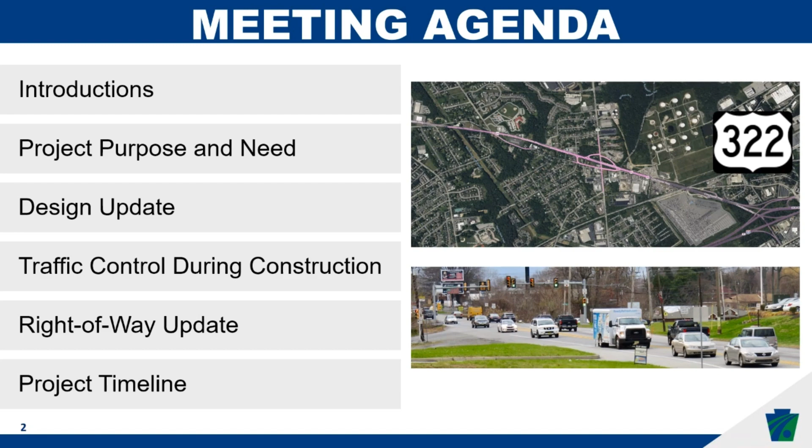Tonight's agenda will cover the project location, the project purpose, design updates, traffic impacts, right-of-way updates, and finally, project timeline. Now, I would like to turn the presentation over to the Design Project Manager, Al Tomaselli, to run through the project details.

Thank you, Merlene. Good evening, everyone. Al Tomaselli with Benesch. First, I want to provide you a general overview of the project. As you can see on the screen, this is a photo of US 322 in southern Delaware County.

We start our project at Route 1, all the way on the left side of your screen. That is Section 101 in green. It is primarily in Concord Township. That project was constructed between 2016 and 2020 and was finalized and is open as a 4-lane primary arterial right now. Section 102, currently under design, covers mostly Bethel Township, but also touches into Concord Township and Upper Chichester.

And the focus of tonight's presentation is Section 103 on the right side of your screen, which extends from approximately Chelsea Parkway through the 452 or Market Street interchange. There is also a section called MIT that you see in blue on the left, which was a mitigation section, where we included an operation staging area to replace the salt shed facility at the Foulk Road interchange that currently exists.

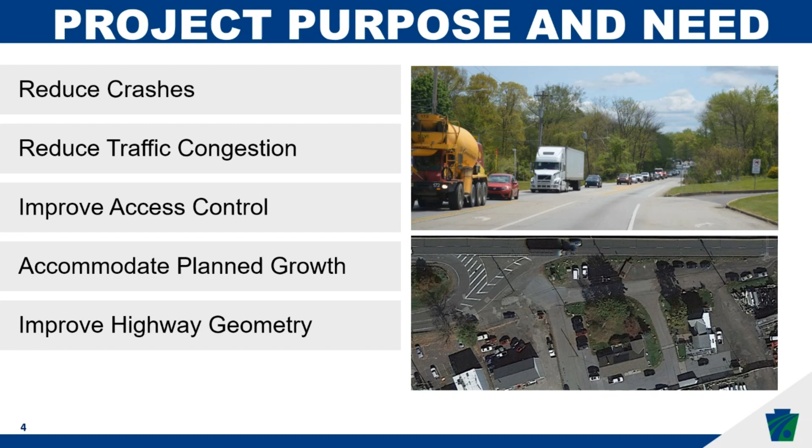Improve access control. What we mean there is there's a lot of uncontrolled access, so wide sections of pavement along the corridor where vehicles can enter or exit just about anywhere. Fourth, accommodate planned growth. If you've driven the corridor, you see a lot of growth out there, and there is still more to come. There are areas to work with, and we wanted to make sure that whatever we did was sustainable for the future. And finally, improve highway geometrics, primarily around the interchanges where acceleration and deceleration lanes are minimal, if existent at all.

Next slide, please. So as part of this project, we basically were going to widen the roadway to 4 lanes. The image on the right that you see is the first day that Section 101 was open in the area of Station Road. You see 4 lanes, left turn lanes, right turn lanes. You can see a little bit of a median in there in the middle of the picture.

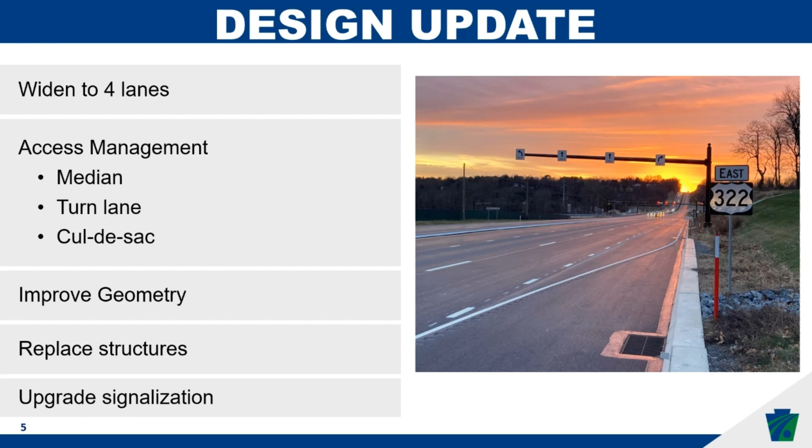That's pretty much the design that's going to go for the entire corridor. There will be a grass strip median with mountable curb on either side. There will be turn lanes for left turns and right turns at intersections, and cul-de-sacs, again, for access management. We're going to improve the geometry at the interchanges, replace all the structures along the corridor, and upgrade the signalization to increase throughput. Next slide, please.

Specifically to Section 103, the US 322 corridor will include 1.4 miles of pavement reconstruction. Some of this is reconstructing the existing 4-lane section, while other sections will be widened from 2 lanes to 4 lanes.

There are going to be 8 intersections reconstructed as part of the Section 103 project, including 4 signalized locations, 1 on 322 and 3 on Market Street.

We are going to be reconstructing 22 structures, including bridges, culverts, retaining walls, sound barriers, sign structures, and ADMS sign structures, which is what you see in the image on the right, and then 10 stormwater management facilities. Since we are widening the road, which increases the impervious pavement, we have to collect that water and control it and safely release it.

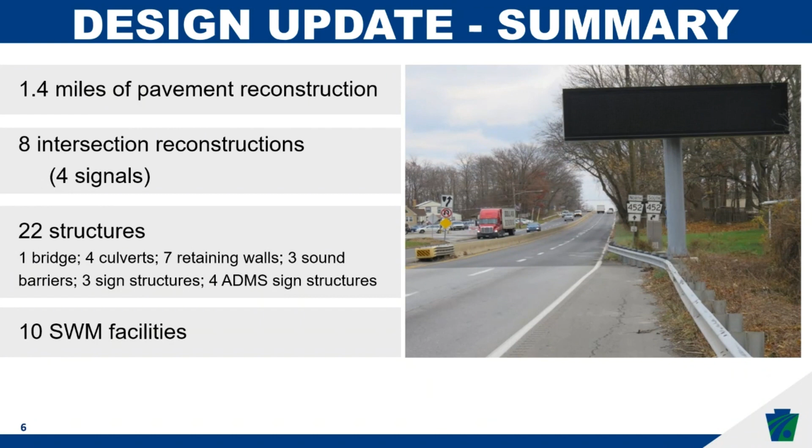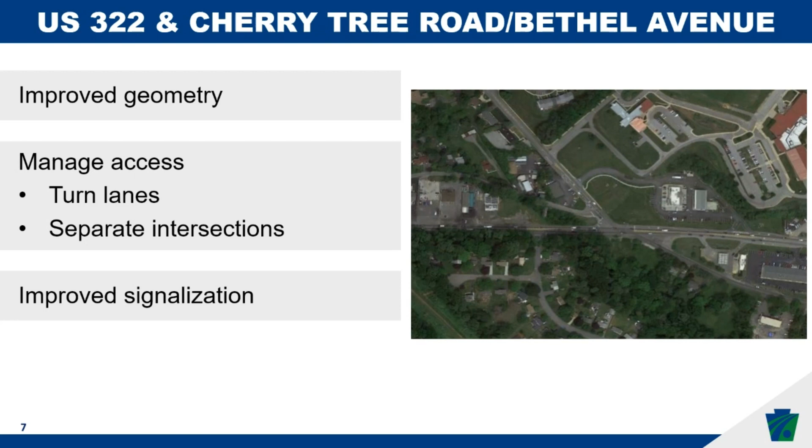Digging into it a little bit deeper, I'm going to point out a couple locations where major changes are occurring. First, the intersection of US 322 and Cherry Tree Road, Bethel Avenue. The existing intersection has both side roads about 5 to 7 feet below the elevation of 322. What we're going to do is improve that geometry by realigning both Cherry Tree and Bethel Avenue to come in at elevation and across from each other so that you can see across the street.

The improved geometry will also allow us to add left and right turn lanes and then separate the intersection of Bethel Avenue and Cherry Tree Road on the north side, which currently intersects almost right at 322. We're going to separate it so that it moves and intersects Cherry Tree across from Hilltop Elementary School. Additionally, we are going to improve the signalization again to increase the throughput.

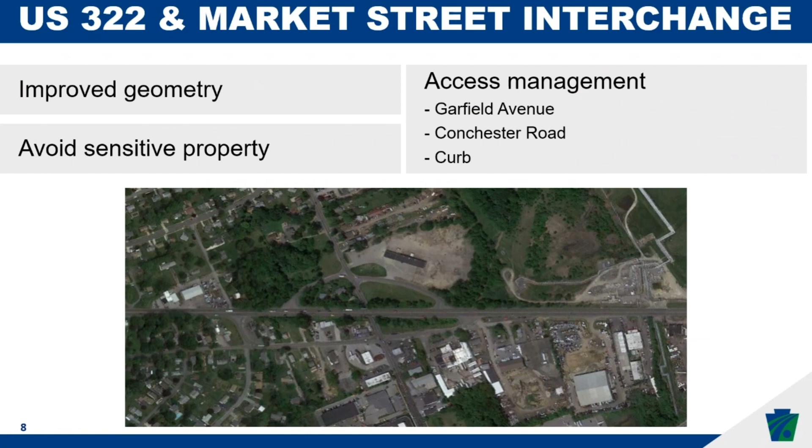The other area along 322 is the Market Street interchange. This interchange is a cloverleaf design, which, as you'll see with the revised layout, is going to become a folded diamond interchange. We have increased radii for the ramps, so the curvature of the ramps will be a bit wider, making it easier to drive through.

We are going to avoid a sensitive property on the northwest quadrant of the interchange, and there is a lot of access management here. There are 2 new township roads that are going to be placed adjacent to 322. In the northwest, or upper left of the screen, is Garfield Avenue, and in the southeast, or lower right, is Conchester Road. That addresses adjacent properties that were going onto the ramps or directly onto 322 — they are now going to access those roads to get to Market Street and then reach their final destination.

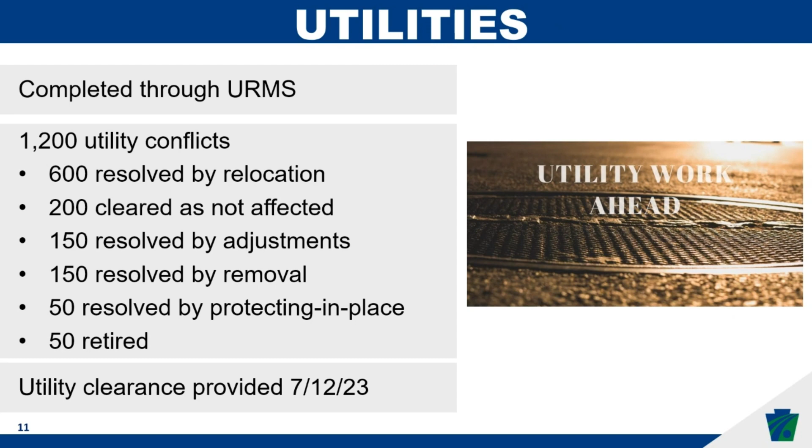Next slide, please. So all 3 of those developments, in addition to voting for a sound barrier, were also given a series of options for the aesthetic treatment on the community side of those sound barriers.

As determined and voted on by the residents, the Oliver Lane, Bethel Avenue, and Kates Glen development area are getting the ashlar stone brown in the upper left. The Bethel Avenue, Dutton Street, and 322 ramp area for Market Street are going to get the ashlar stone gray in the upper right. The Capri Circle and Flora Lane residents requested the chiseled limestone brown on the bottom.

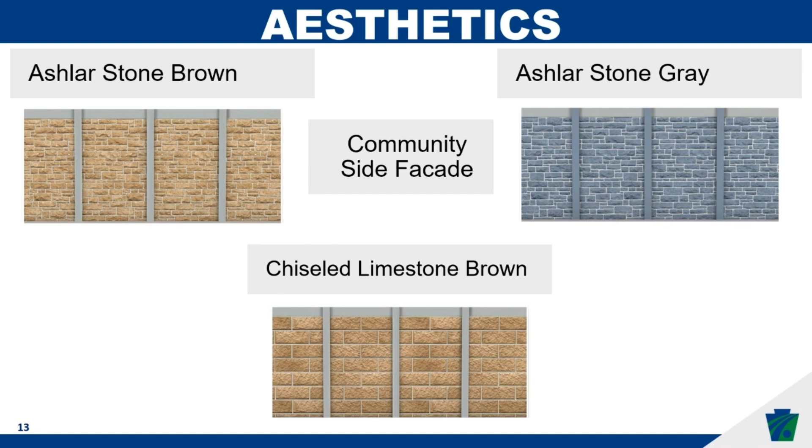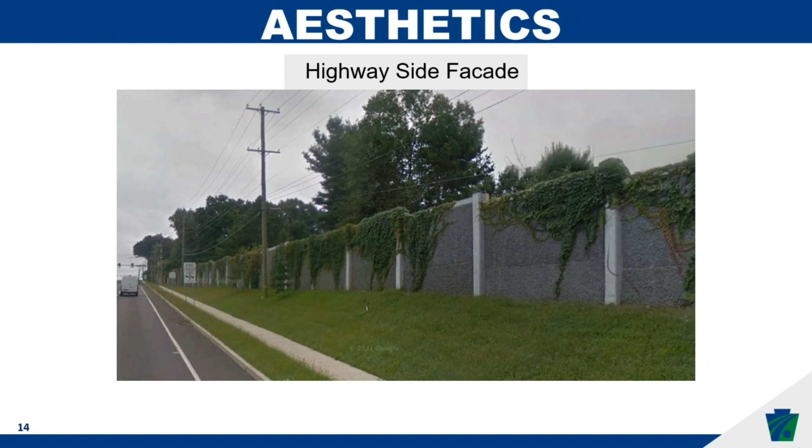Next slide, please. So that's what it's going to look like on the community side. On the highway side, we're going to have a consistent highway side facade of an open aggregate sound barrier and Virginia creepers coming up like you see on the screen. Pretty much this is what it's going to look like in the long term once the vegetation has grown in.

Next slide, please. So how long is this job going to take? Once we have notice to proceed, the first stage that's going to occur is a lot of utility work. As you saw, we have about 1,200 conflicts, and about 600 of them are being relocated. So a lot of utility work and a lot of side road work on Bethel Avenue and Cherry Tree Road is going to occur, along with some work on Market Street. That's going to take about 1.5 to 2 years to complete.

Once we're through that, we are going to build the eastbound lanes on 322, the south side of the corridor. In stage 3, we are going to flip traffic onto those future eastbound lanes and reconstruct the existing 322, which will become the westbound lanes. All in all, this job is going to take at least 5 years, potentially up to 6 years to reconstruct, given all the work that needs to be done.

Next slide, please. So what's it going to look like out there while we're doing that work? The short answer is it's going to look exactly the way it looked in section 101.

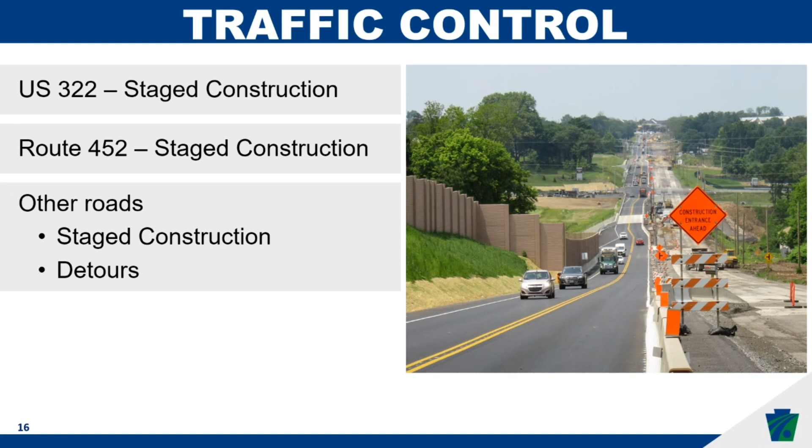US 322 is going to be staged construction, very similar to what you see to the right of the screen. There will be a barrier separating live traffic from the construction workers, and there will be a lot of work going on behind there. Route 452, or Market Street, will also be staged construction with a very minor exception, which we'll discuss on the next slide. And then the other roads will be staged construction or detours, which are going to be described further in the following slides. Next slide, please.

The major detour of all is going to be Route 452 at 322. For 2 weekends over the course of the project, separated by at least a year, Route 452 or Market Street will be closed for a weekend at 322. All property owners will be able to access their properties.

The detours are shown here. If you are going northbound on 452, trying to continue on 452, you will go onto 322, up by 95, up the Blue Route or 476, and come down Route 1 to get back onto 452.

Southbound traffic will access 452 by going onto 322, going to Foulk Road, turning around, and then getting back onto Market Street. Again, these will be weekend detours. They will be open for Monday morning rush hour. Next slide, please.

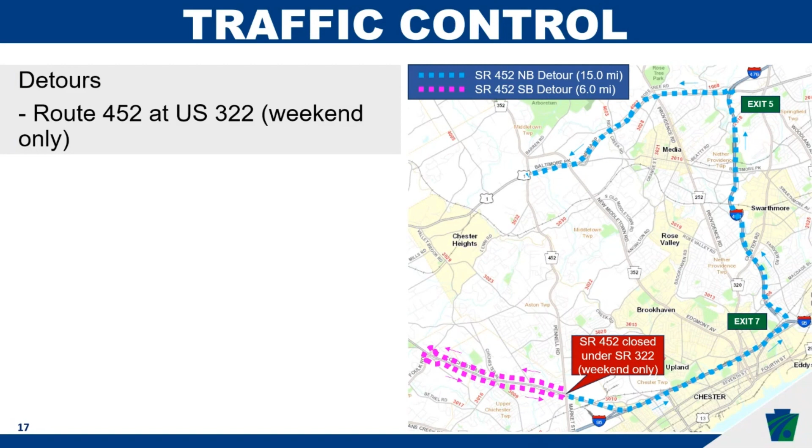The Bethel Avenue at 322. When I showed you the slide for the 322 on Cherry Tree Road, Bethel Avenue intersection, you saw there was a lot of reconstruction going on there. We're realigning both roads. We're also raising both roads about 5 to 7 feet. To do that work, it involves a lot of earthwork, a lot of utility relocation, and unfortunately, we're not able to keep Bethel Avenue open at 322 for the entire length of that.

The detour route will take you over to the Market Street interchange, and you'll be able to get to Bethel Avenue from there. Also, as a reminder, we will not be restricting access to any of the properties, so every property will have access during this detour. This detour is anticipated to last about 5 months.

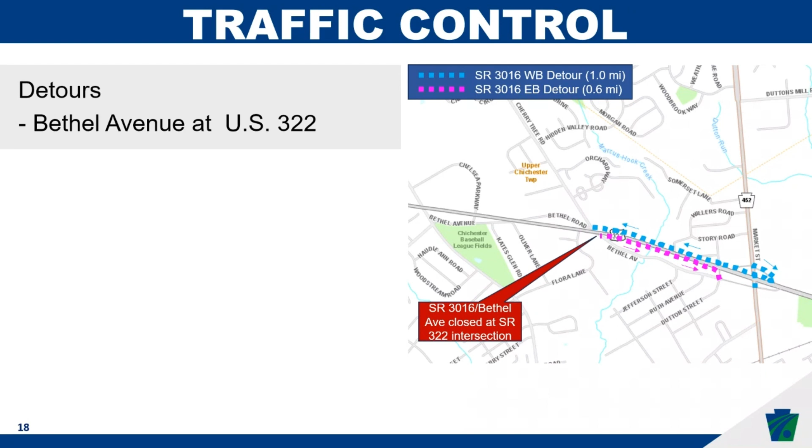Next slide, please. Another location on Bethel Avenue is the Bethel Avenue Bridge at Marcus Hook Creek. Because of the bridge location and the adjacent properties, we're unable to stage that construction as well. That detour will access Bethel Avenue either from Cherry Tree and 322 or from the Market Street interchange during that time period. We're anticipating that to be a 7-month construction, and again, at all times, property access will be maintained and property owners will be coordinated with through that.

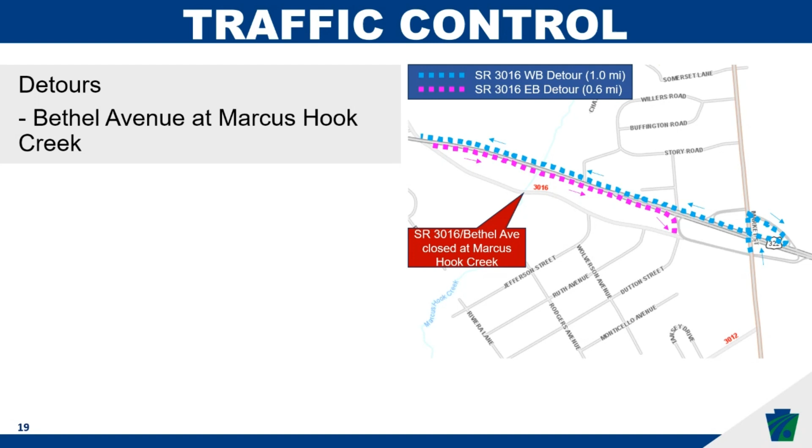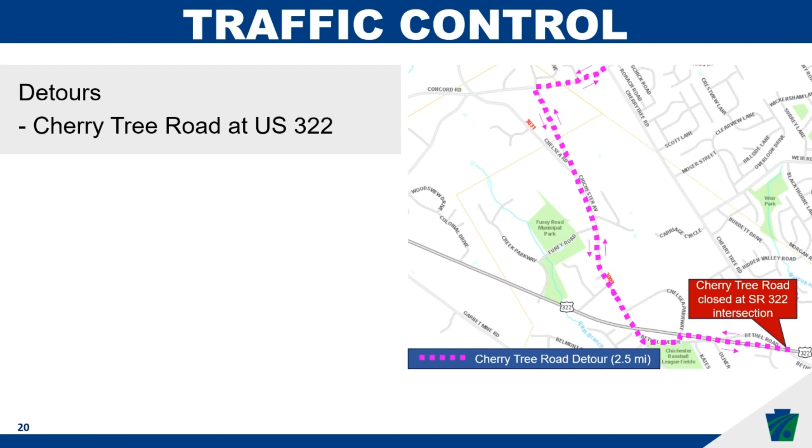Next slide, please. The next detour is Cherry Tree Road. Again, with the elevation differences and the realignment, there will be a very small period of time where we have to detour Cherry Tree Road. We're anticipating this will be approximately a week, since it's a smaller section compared to the Bethel Avenue area where we have to raise and move a lot. The detour for that will go onto 322, onto Bethel Avenue, up Chichester Avenue, and over Concord to get back to Cherry Tree Road.

Next slide, please. The next couple of slides are going to be a series of detours for ramps at the Market Street interchange. First one here is the eastbound on and off ramps, which we call ramps I and M, at the area of Dutton Street. These detours will be approximately a month, and that detour route will take you over to the Bethel Avenue interchange or using other ramps at the Market Street interchange as appropriate.

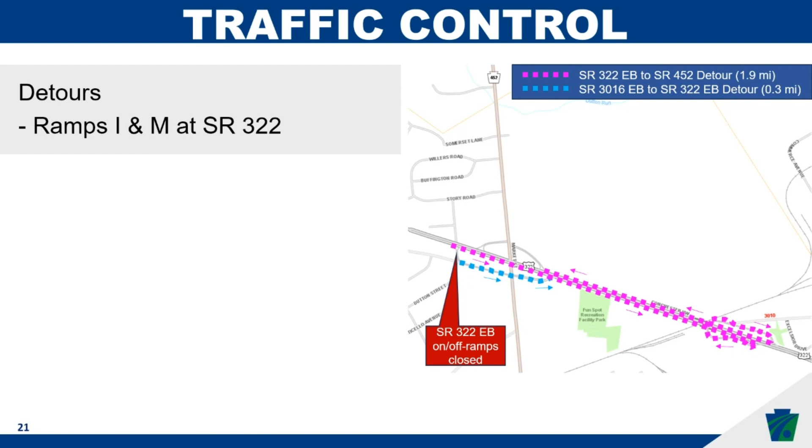Next slide. Again, another ramp here, the eastbound on-ramp and off-ramps that will be removed as part of this project, will at one point need to be detoured because we need to do some work to raise the grades to meet the new 322. There'll be approximately a 4-month period where this needs to be done as we're also building 322 in that area. The rerouting will be using the Market Street interchange ramps on Bethel that come off of Bethel Avenue adjacent to Dutton Street.

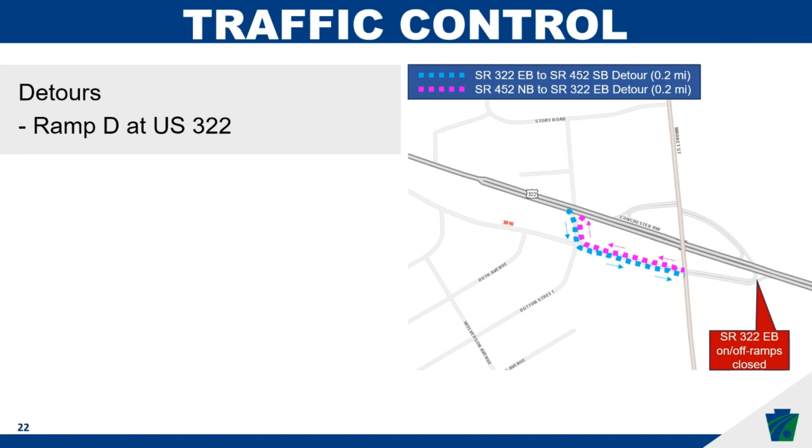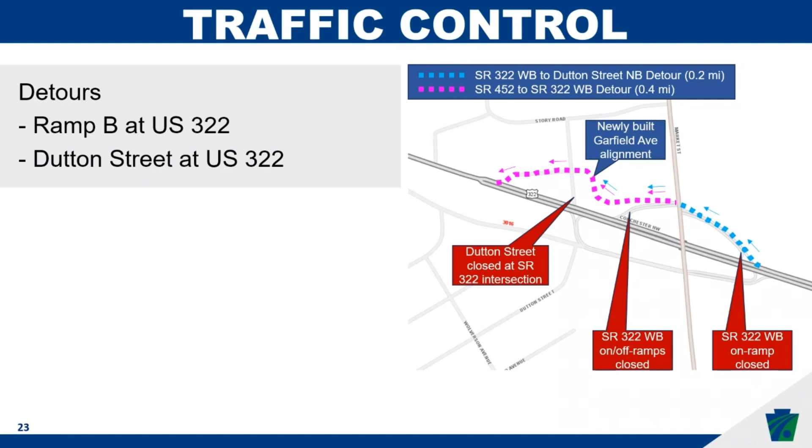Next slide. On the westbound side, or the north side of the interchange, at one point we do need to close off both westbound on-ramps and one westbound off-ramp. There will be a detour that will take you onto the new Garfield Avenue alignment and then bring you back onto 322. This will be approximately a 1-month detour, and for the time being you will use that Garfield Avenue, go to the cul-de-sac at the end of Bethel, and there'll be a temporary roadway to connect you to 322. Next slide.

And then the last detour is Bethel Avenue at Oliver Lane. Because of the widening of 322, Bethel Avenue and Oliver Lane will not be connected in the future. Both sides will be cul-de-saced, and once this is closed, it will not reopen.

For the time of traffic control, once we do that closure, we will provide signage to let local residents and those who are not familiar with the area know how to get to Oliver Lane from Bethel Avenue and vice versa. This concludes my portion of the presentation, and I'll hand it back to Marlene.

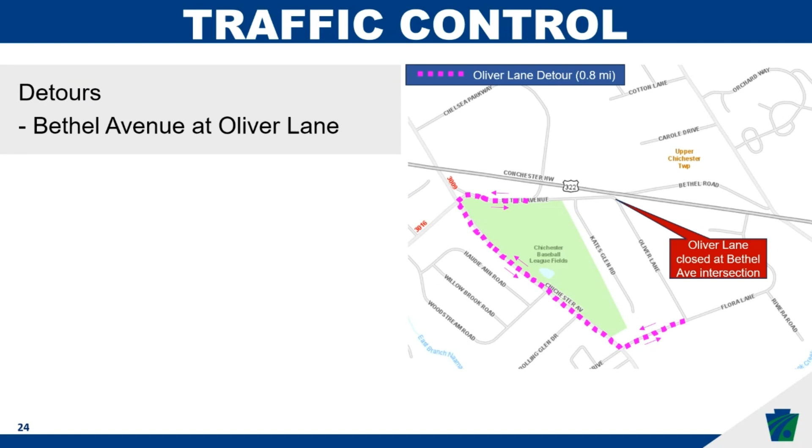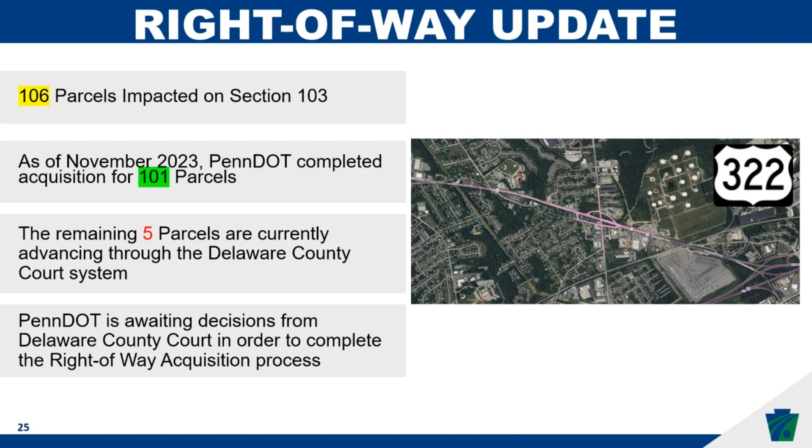Thank you, Al. Next, to provide a right-of-way acquisition update is Angela Palermo, Project Manager with Aero Land Solutions. Thank you, Marlene. So for Section 103 of this project, there are a total of 106 parcels impacted. As of November 2023, PennDOT has completed the acquisition for 101 of those parcels. The remaining 5 parcels are currently advancing through the Delaware County court system, and at this time PennDOT is awaiting decisions from the Delaware County Court in order to complete the right-of-way acquisition process. Back to you, Marlene.

Thank you, Angela. For the final design project timeline, the department will conduct a series of administrative tasks before construction can begin. Once the right-of-way clearance is issued, finalizing the construction bid package will take approximately 2 weeks. Advertise and solicit contractors' bid is usually a 7-week process. Open bids is 1 day. Award and execute the construction contract will take approximately 8 weeks. Pre-construction meeting with the contractor will be a 1-day event. Contractor notice to proceed will also be a 1-day event. Upon completion of these tasks, construction will begin.

This concludes our presentation. We will now take questions via the Q&A button. As Al is queuing up our first question, if you are able to navigate the project webpage, there is a comment form where you can also ask additional questions and provide feedback on the presentation this evening.

So Marlene, the first question is: is the speed limit of the section expected to be raised after completion of reconstruction? It seems odd that the completed Section 101 has the same 45-mile-an-hour speed limit as the non-reconstructed sections, despite being much safer and designed to a better standard. Though it would make sense if the plan is to wait until all sections are complete to avoid short high-speed sections. I would think 50 or 55 miles an hour would be better once it is all done.

Would you mind answering the question? Sure. So the speed limit of the roadway for the entire Section 100 project is being maintained at 45 or 35 miles an hour, based on what the existing speed limit is now. Based on discussions and design criteria, the speed limit could not necessarily be raised without additional adjustments to the corridor following the completion of the project. So the short answer is it'll be maintained at what the existing speed limit is today. Thank you for the question.

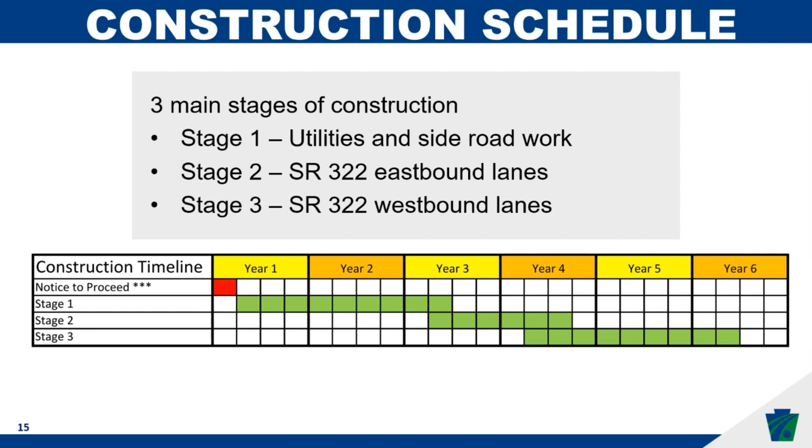We have another question here. The question is, so when is the projected start date? Marlene? So the projected start date will be based on acquiring all of the parcels that are needed for this construction. At this particular point in time, we don't have a specific start date to provide to the public. The moment that the acquisition is completed, we'll be able to provide that information.

Thank you. We have another question. The next question is, what happened with Section 102? If we can go back to slide number 1, Section 102 is still in existence. The project was split into multiple sections in order to better accommodate a comprehensive construction package. The department made that decision in order to keep a certain amount of monetary value associated with the construction package. Section 102 will follow the final design for Section 103.

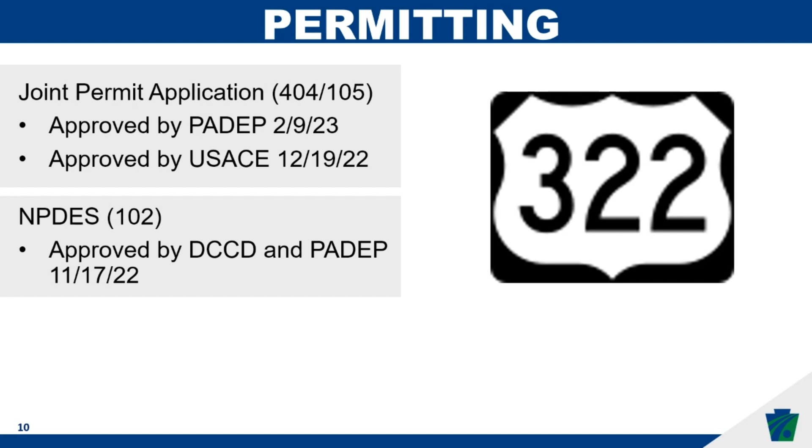The next question is, what about stormwater? I can take this question if it's okay, Marlene. Thank you. The stormwater for the entire corridor is being dictated by control measures provided by reviewing agencies. The permitting agencies, which I discussed in one of the slides here, primarily are Delaware County Conservation District, Pennsylvania DEP, and U.S. Army Corps of Engineers. As of the beginning of 2023, slide number 10, yes — as of the beginning of 2023, the reviewing agencies have all reviewed and approved the project permitting and stormwater management controls for the corridor. So we're ready to roll with that once the right-of-way is addressed.

We have another question here, which is: should I hold off on adding an addition until construction is completed? I can answer that question. I would think that's a personal homeowner decision. The department really cannot dictate what a homeowner does in reference to their personal properties.

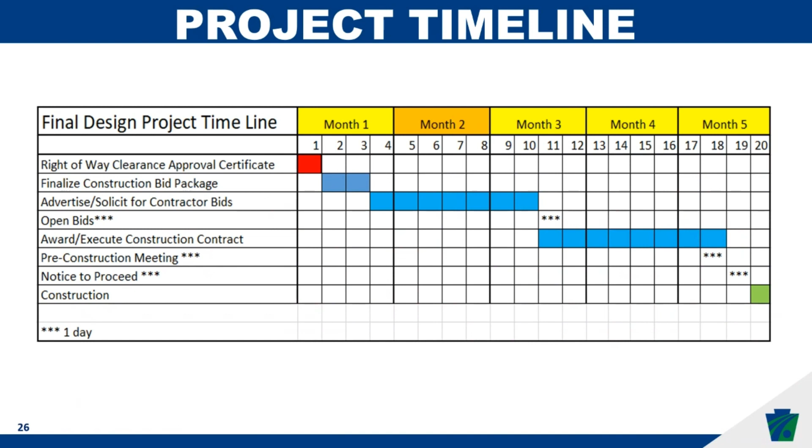The next question: will the lighting be synchronized from 452 to Route 1 during rush hour? The simple answer is yes. The more complicated answer is, based on the distances between the signals, it will be synchronized as well as it can be. As you know from driving corridors, if there's too far a distance between intersections, sometimes synchronization or platooning of vehicles is difficult because some people drive quicker than others. However, to the best of our abilities, we will have those intersections synchronized along the corridor.

Next question: what is the construction start and end dates for Section 102? Section 102 final design will be in accordance with the construction of Section 103. At this point, we are not able to give definitive answers about the dates because we want Section 103 to be in construction prior to letting Section 102.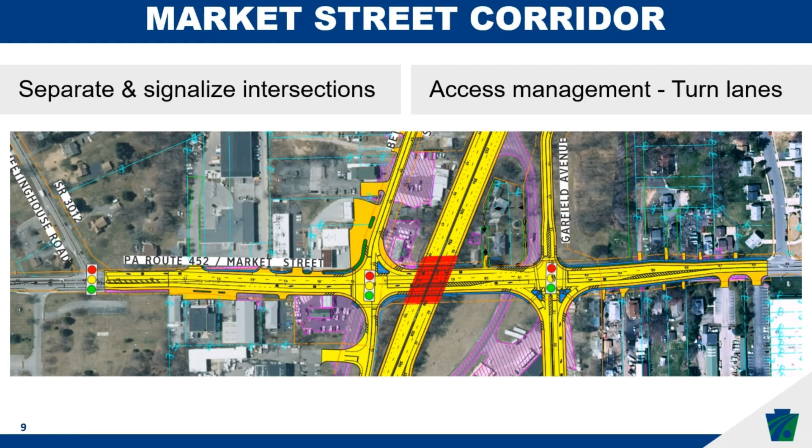Thank you, Merlin. We have another question: is the bridge over 452 going to be reconstructed? Yes, the bridge over 452 will be reconstructed. It also will be raised to meet current standards, and that is part of the reason why we have to have those weekend detours of 452 at 322. The style of bridge that exists requires demolition, which means we have to close 452 for that work.

We have another question: was there any thought given to sound barriers on 322 between 452 and Cherry Tree on the north side? Yes, all residential communities from Route 1 through the 452 interchange were investigated for sound barriers. There were a series of meetings in early 2020 where the details of that analysis were provided to adjacent residential communities. If a community did not receive a sound barrier, there was an explanation as to whether it was because of the number of driveways, the proximity of residential properties, or any other justification. There are nationalized and standardized criteria we have to follow, and residential properties were notified of all that information.

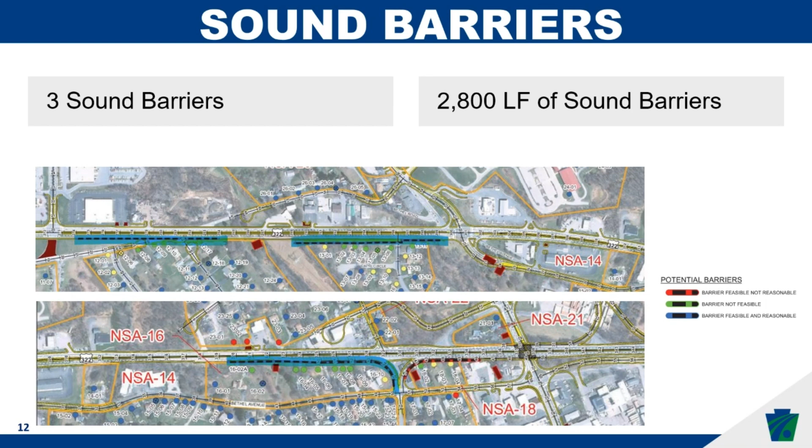There's a question about the 322 entrance onto I-95. Tonight's presentation is for Section 100, which covers from Route 1 to 452, Market Street. There are projects to the east of this which we're unable to talk about tonight. It's not within our project scope.

There is a question about northbound on 452 needing to go left to east on 322 - how many cars fit in the left-hand turn lane? I will not venture a guess off the top of my head, but the analysis conducted to identify the length of that left turn bay accounted for the projected traffic that would make that left turn onto Bethel Avenue. So I don't have an exact number right now. But if you send us an email via the website or a comment via the website, we can more directly answer that question.

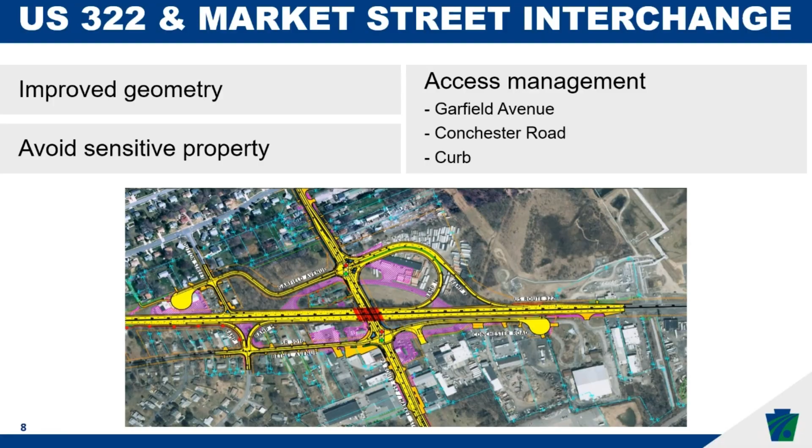We have another question: when will property that is already acquired and slated for demolition undergo demolition? Specifically Bethel Avenue eastbound with garage on 322. We don't have the exact date for demolition of the properties that have been acquired. I would appreciate it if you could send the question again via the website, and then I can have a better answer for you at a later time.

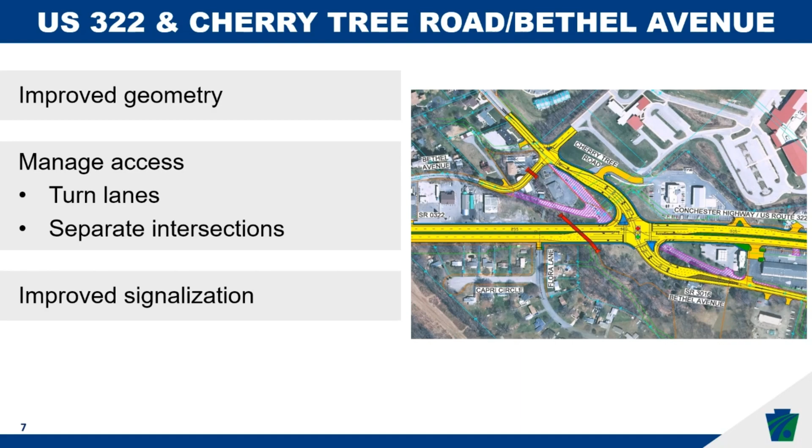We have another question: who will maintain the grass median where it exists? I believe that the maintenance department will be able to maintain the grass median for the state roadways.

There's another question: will the project be opened in stages or all at once? As lanes can be opened on 452 and 322, and as it is safe to do so and doesn't need to be constantly opened and closed, they will be opened. Realistically, it is at the end of the project when all four lanes will be open to unrestricted traffic.